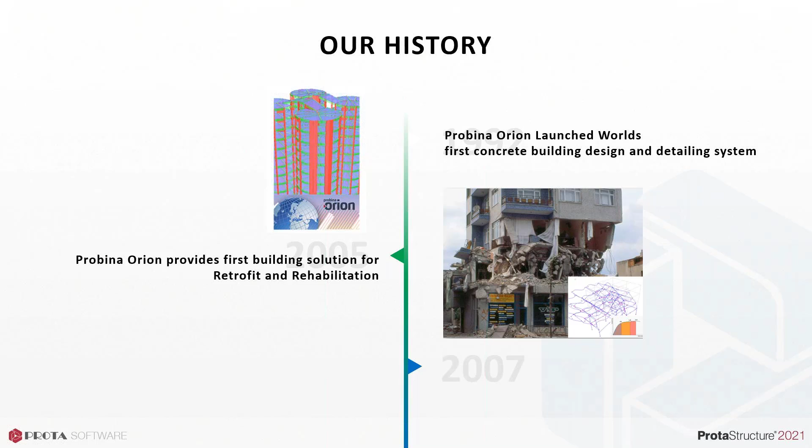world. Here, I want to briefly summarize some of the milestones of ProtaSoftware's journey throughout the years. In 1992, Prota launched Probina Orion, which is the world's first concrete building design and detailing system. In 2005, Probina Orion provided the first building solution for retrofit and rehabilitation. In 2007, Prota invested in BIM technology and launched ProtaBIM, which provides bidirectional physical model integration with leading BIM platforms.

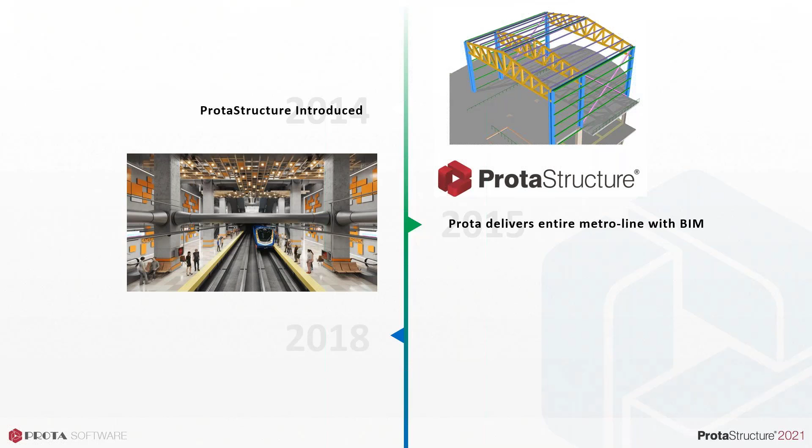In 2014, ProtaSoftware introduced the revolutionary ProtaStructure suite. In 2015, Prota delivered an entire metro line with BIM technology. And in 2018, Prota's engineering team delivered the world's largest passenger terminal building in Istanbul. So the structural design of this entire terminal building was delivered with ProtaStructure.

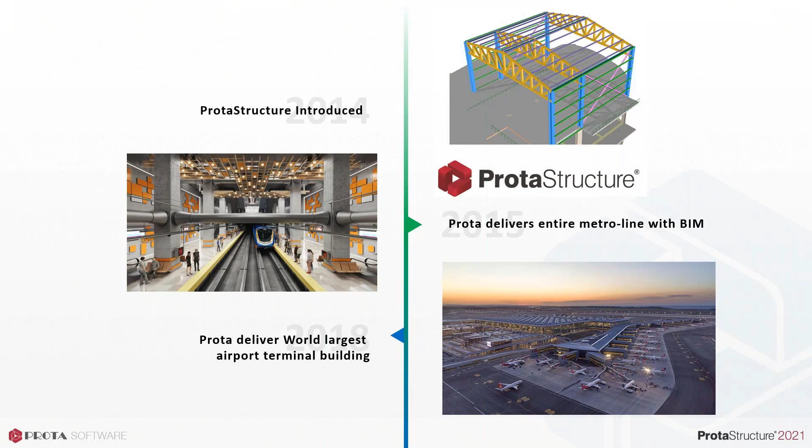So ProtaSoftware's latest technology solutions available for the structural engineering market: we have ProtaStructure for modeling, analysis and design of your structures. Prota Details for your automated detail drawings. It includes intelligent rebars and design libraries such as retaining wall, staircase design and detailing. Prota Steel is our latest technology solution for steel detailing and connection design of your structures. There are drawings and calculation reports within this technology. And we have Prota BIM, which is our BIM tool to bidirectionally link your models with other BIM platforms like Autodesk Revit.

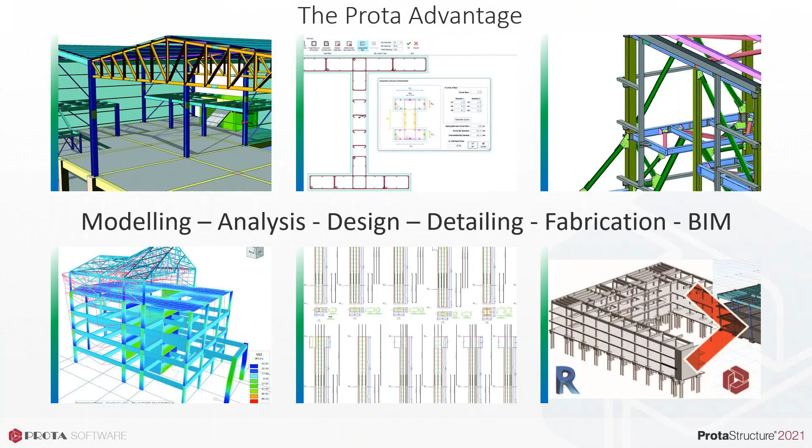So modeling, analysis, design, detailing, fabrication, and BIM. We are very proud to introduce our latest structural BIM design software solution, ProtaStructure 2021. So the Prota advantage is that it is a complete package for modeling, analysis, design, detailing, fabrication, and BIM.

Now I would like to hand over to Dr. Şadan for his introduction to seismic design presentation. Dr. Şadan has a PhD degree in structural engineering from Politecnico di Milano. Having nearly 20 years of global structural engineering experience, by the way, he used to work at a managerial level at Prota Engineering, he founded his own company, OBS Earthquake Engineering.

Dr. Şadan is an expert in earthquake engineering, earthquake resistant structures, seismic assessment, and retrofit of existing buildings. He has also played an active role in the preparation of special rules for design of seismic isolated building section in the new Turkish seismic code for buildings. Thank you. Dr. Şadan, you can start your

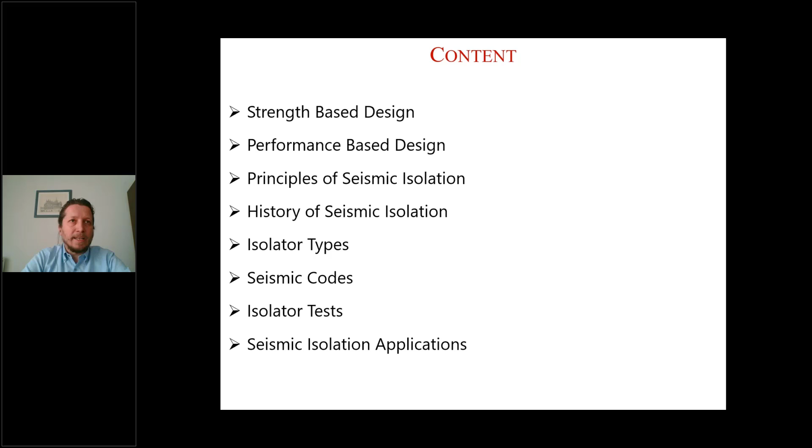In today's presentation, first I will talk about the strength-based design, give a little bit information about performance-based design, which Dr. Tüzün introduced nearly 3 weeks ago or a month ago. Then I will talk about principles of seismic isolation, the history of seismic isolation, the isolator types, seismic codes, isolator tests, and give you some photos and information about seismic isolation applications worldwide.

Let's start with strength-based design. Why I start with strength-based design is that unless you are performing a nonlinear analysis, the design that you are following in the seismic codes worldwide is a strength-based design. When we say strength-based design, it means that you calculate an equivalent seismic force acting on the building, you distribute this seismic force, and you provide sufficient strength for your building to resist these seismic forces.

Like in this example, we can see a bridge bent here with the mass concentrated on the deck level. When there is an earthquake excitation, the inertial seismic forces are acting on the mass of the structure. Then, as a response, some moments and base shears are developed in the structural system, and you design your system. If we designed this bridge bent as elastic, then the structural elements should have sufficient capacity to resist these seismic forces without any damages.

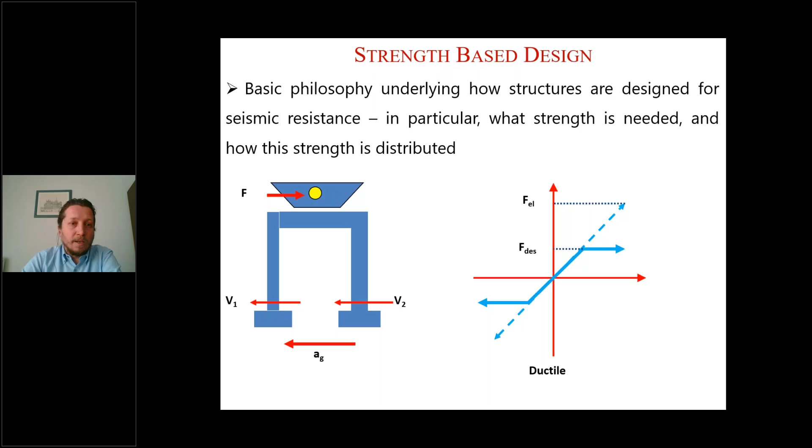However, what we do in strength-based design is not like that. What we do is we divide the elastic forces by a strength reduction factor. Sometimes it is called behavior factor, and we design our structures to this level of seismic force. This means that, however the seismic forces are acting at this level, we design our structure at this level of seismic forces. This means that some damage will occur in our structural elements, but our structural system should have enough capacity to resist these deformations. This was the design for seismic forces.

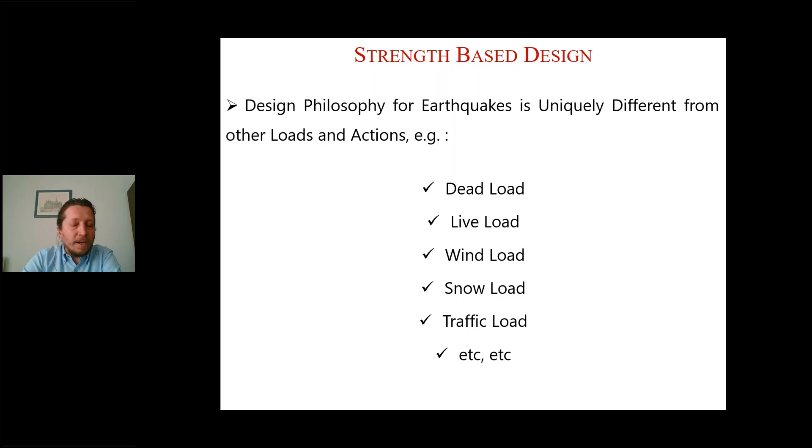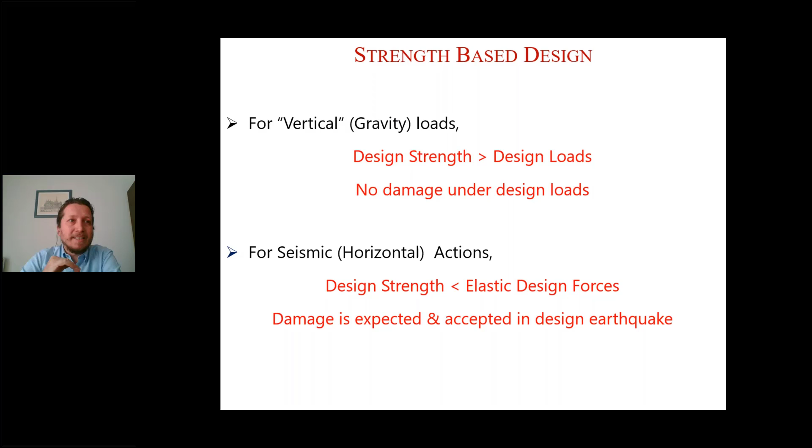However, design for normal loads, what we call dead load, live load, wind load, snow load, traffic load, is different than design for seismic loads. In design for normal loads, we do not want any damage to our structure. We provide sufficient strength to our structural members to resist the normal loads without any damage. However, for seismic actions, it is opposite. We provide less strength than the seismic forces, and we accept that our building will go beyond the elastic deformation and it will suffer some deformation and damages, but the building needs to be stable at the end of the earthquake without a total collapse.

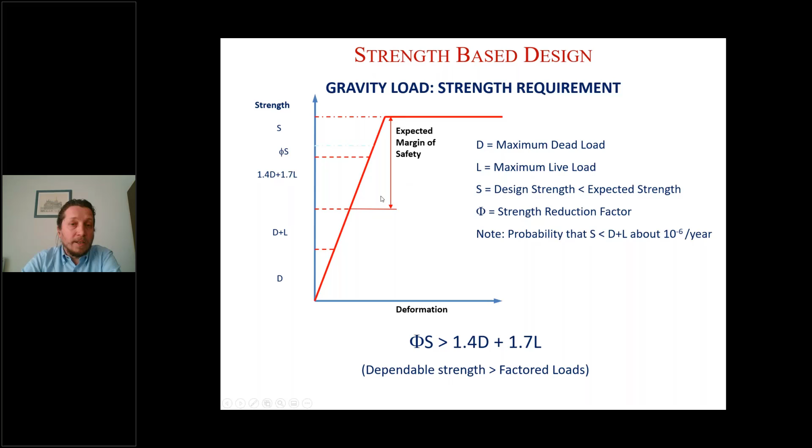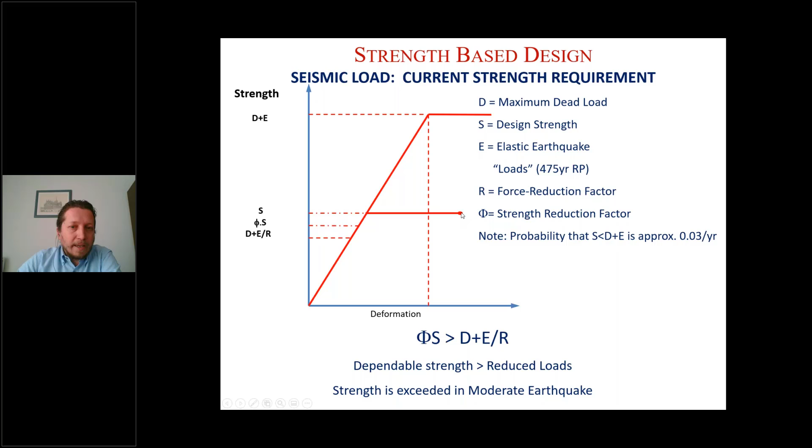In seismic design, it is a little bit different. This is actually the demand of earthquake, the force level that develops when an earthquake hits the structure. But we design our structure at this level, dead load plus earthquake load divided by a force reduction factor. However, we might have a little bit higher strength, since the expected strength of the material might be a little bit larger at this level. And after this level, the building gets damaged, and some hinge mechanism starts to develop. The building should have enough capacity to resist this level of deformation.

The deformation level depends on the amount of seismic action. For a service level earthquake, which we can say is an earthquake with a return period of about 50 years, the deformation will be very limited. Maybe some minor, hairline cracks that can be repaired. For the design level earthquake, where you design your structure, the building will go through a big amount of nonlinear deformation, which means damage in the building, that can be repaired or maybe not repaired after an earthquake. And for the extreme level earthquake, where we design special structures like hospitals or highway structures, important structures, the building goes to further deformation and it should not collapse.

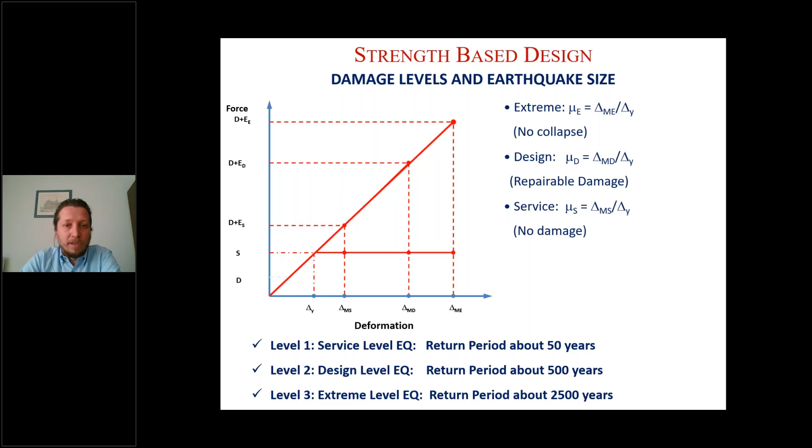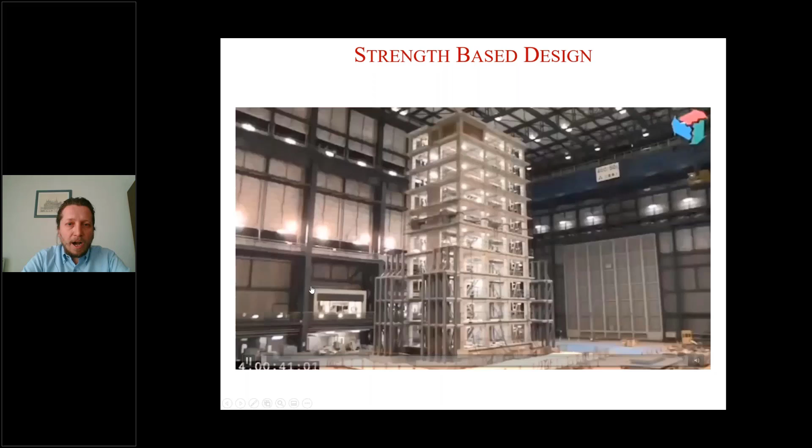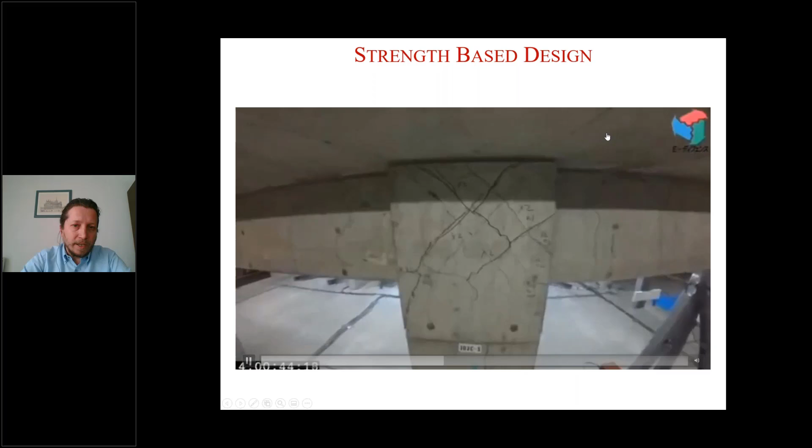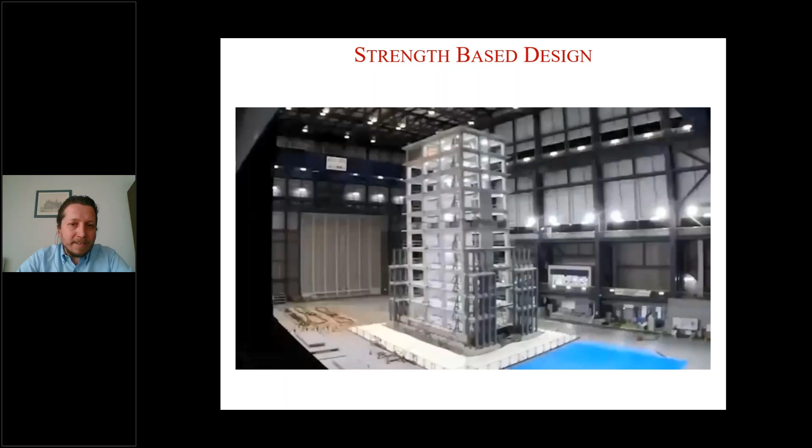Let's see a full-scale building that was tested in Japan at E-Defense Laboratory, and let's see how it behaves. It's a conventional design. When you see there are deformations, because of the relative drifts of the stories, there are deformations, especially in the beam column joints, and this is expected. When we do a strength-based design, we have to follow the capacity design rules to have the damage at the desired locations of our building and not to have collapse.

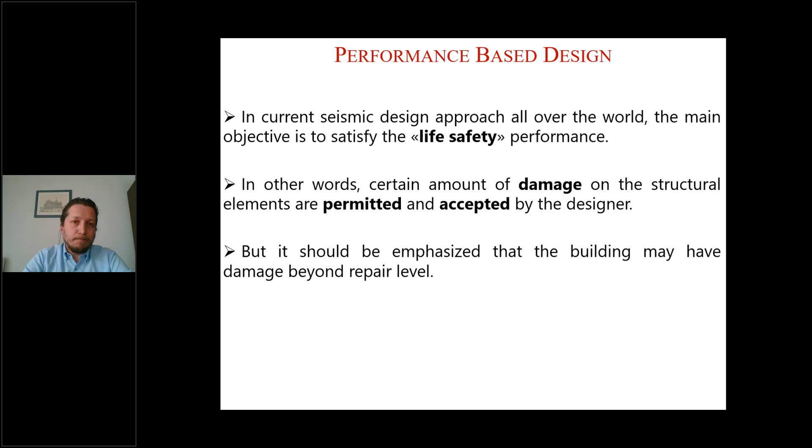Even if you say that for an important structure, for example, a hospital, okay, this is a hospital, it's an important structure, so I have an importance factor of, in the Turkish code, 1.5. This means that you are increasing the seismic force that you are designing your structure for by multiplying it by 1.5. Yes, you can have a building that can resist the seismic actions.

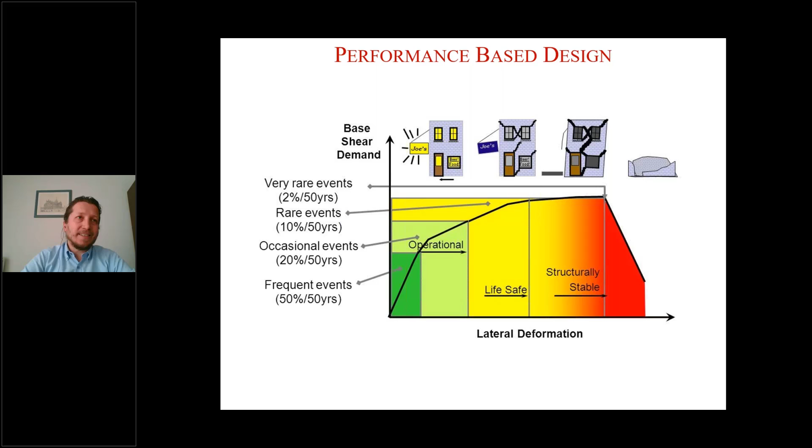Maybe there won't be any structural damage, or maybe there might be some minor cracks that can be repaired after an earthquake. However, when you go inside, you might experience a scene like this. These are buildings. For example, the one on the top was a building that we visited while we went to the Seismic Isolation Conference in New Zealand in 2017. There was an earthquake. The building was designed with modern codes in strength-based design.

This is the view from outside. This photo was taken by us from outside after an earthquake that happened something like 150 kilometers away from the epicenter. And this is the photo, the scene from the inside. Even though you can protect the structural system from earthquakes, inside you might experience a scene like this. Or these are some scenes from other earthquakes, an airport and a hospital.

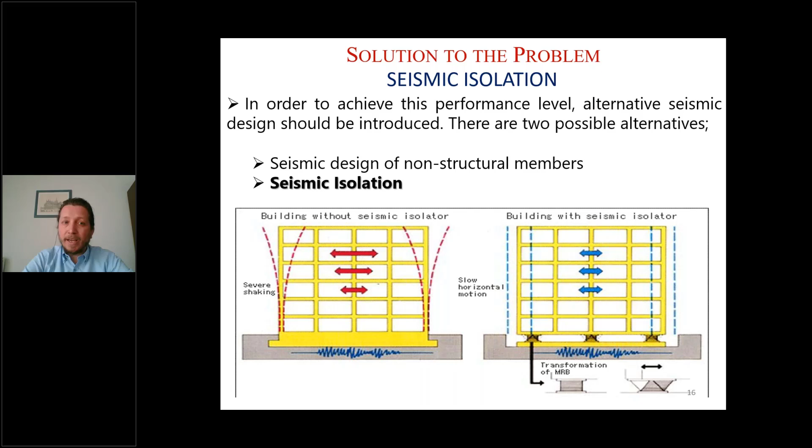A hospital that you designed with an importance factor of 1.5 may seem undamaged from outside, but inside you might see a scene like this, and you cannot use the hospital after an earthquake, when you really need it. So this was the problem. You can protect maybe the structure, you can have some minor damage in your structure, but it is very, very hard to protect the non-structural components in a building. Either you have to make a special seismic design of non-structural members, which can go very expensive, or you can isolate the building. This is the solution of the problem.

So let's talk about seismic isolation. At this seminar, we will not talk about the seismic design of non-structural members, but we will talk about seismic isolation of buildings.

What is seismic isolation? In a conventional design, during an earthquake, the building moves like this. There are deformations at story levels, and due to the relative drift of the story levels, these deformations in the column-beam joints create damage, and the building might not be usable after the design level earthquake, might need to be retrofitted, or maybe demolished and reconstructed. The earthquake has a displacement demand on the building, and the displacement demand for a conventionally designed building is provided by the relative story drifts.

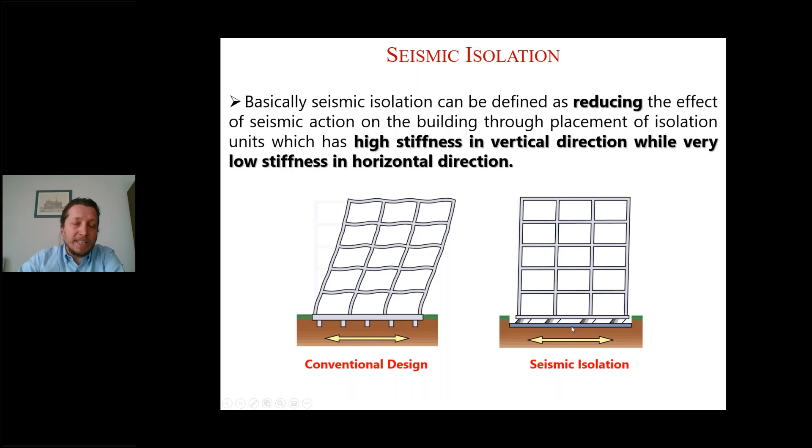However, in a seismic isolated structure, you decouple the building from the ground level. You put some members, some bearings that are very flexible in the lateral direction, but very stiff in the vertical direction, so that they can carry the vertical load of the building, but during an earthquake they can move in the lateral direction. The displacement demand of the earthquake is provided by the seismic isolators in this case.

How does it work? Seismic isolation works by modifying the vibration properties of the building by installing the isolators. As such, the destructive signals of the seismic event are reduced. There are two figures here. One is the seismic isolated building on the left. The other one is the conventionally designed building. You can see that during a seismic event, the inhabitants of the building might not even notice that there was an earthquake, and all the structural and non-structural members are protected in a seismic isolated building.

However, in conventional design, you can see that even though maybe the building does not collapse, non-structural components fall down, some mechanical equipment and pipes can break, and the building might not be usable after an earthquake. So the main benefit of seismic isolation is the reduction of the story drifts, which is related to the damage in the building, and reduction of story accelerations, which means that you reduce the seismic force acting on the building.

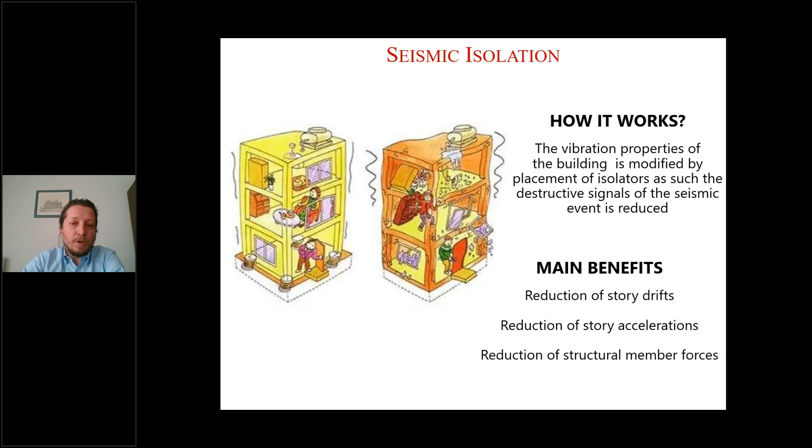Hence reduction of structural member forces. Let's see a similar test for a seismic isolated building that was tested in Japan, a shake table test. Below you see a blue surface, that is the shake table itself, and the green pistons on the left that simulate the earthquake for this building.

The building is a reinforced concrete building that was designed as a hospital. You can see the furnitures in the building, and below there are seismic isolators, and it's a strong shake. Actually, the building moves over the shake table, which represents the ground.

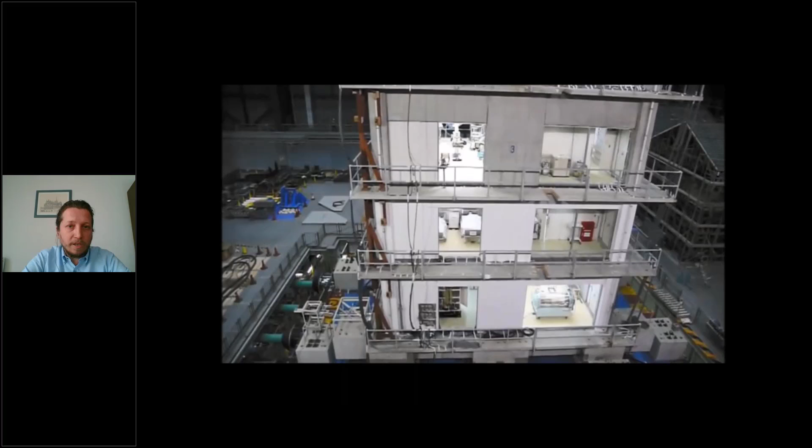It floats nearly. What you see is that only the sliding components of the building and the roller furnitures move in the building, but the overall system does not get damaged, and there are no non-structural damages in the building. If this was a conventional design building, you will see both structural damage and non-structural damage at the same time.

This is another video recording that was recorded during Tohoku earthquake. Maybe it is a little bit further than the epicenter of the earthquake, but here you see the ground level column. The seismic action started, the earthquake started. You see that only the ground moves, but the building is like floating on the isolator, which is the black member here. And here you see the displacement that it makes. Since it is a little bit far away from the epicenter, the displacement levels are nearly 10 centimeters.

And here you can see the acceleration records in the ground floor and above the isolator. And you can see that the acceleration levels are reduced nearly maybe 3 times, 4 times.

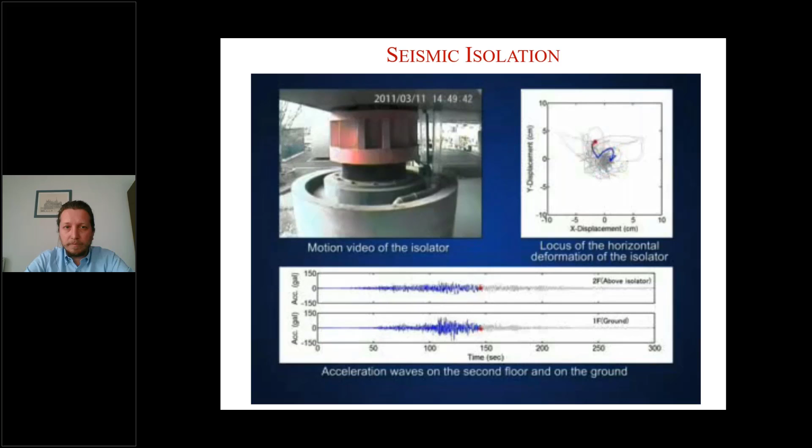Another footage from an earthquake in Japan, again, I guess. This is the building, a seismic isolated building. Please notice the shoes on the ground and the building here. And when the seismic action starts, actually the ground moves, not the building again. And you can see how the building reacts to the earthquake. You see how the ground displaces during the seismic event, but the building stands still.

Yes, we talked about how good seismic isolation is. It's a new technology. No, actually, it is not a new technology. In history, it has been used, maybe consciously or unconsciously, several times. For example, one example is a tomb in today's Iran. It's the tomb of Cyrus, a Persian emperor.

When they designed this tomb, over the ground they put stones that act like a foundation, without any connection to the ground and without any connection between each other. So during an earthquake, these stones move on top of each other, and by friction they damp the earthquake forces, and this tomb is still standing after several thousands of years.

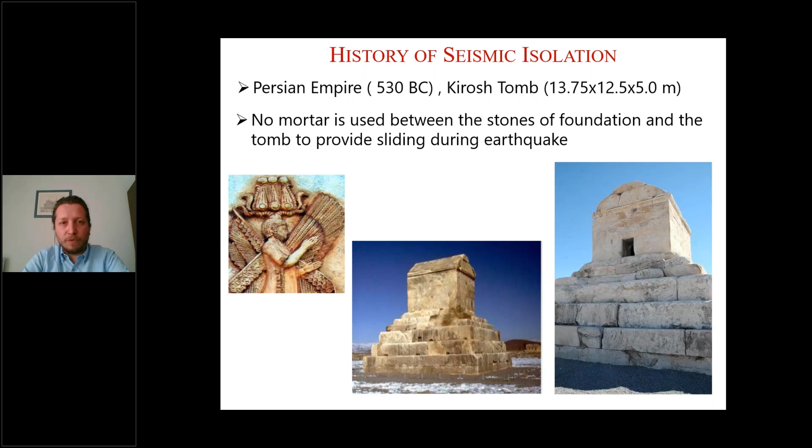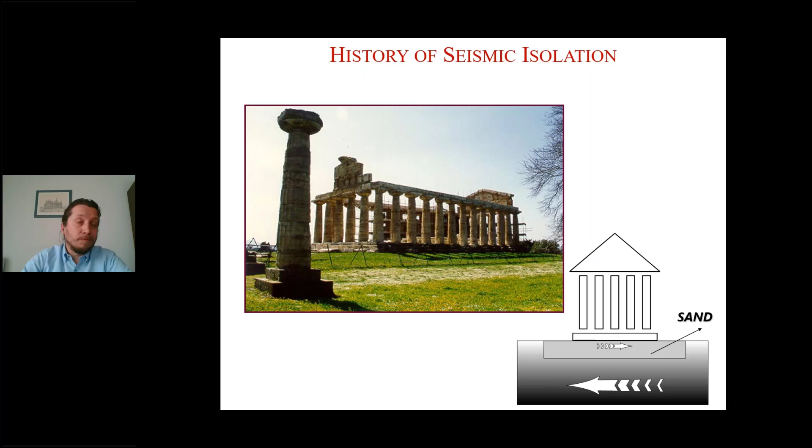Another example might be the Greek temples. You can see Greek temples standing like that. They are very vulnerable structures. They are constructed on stiff soil with a sand level on top. So during an earthquake, the temple moves on the sand layer, and they do not get harmed, or at least they get less damage than a conventional design.

Another example from Istanbul, an obelisk, the Theodosius stone, that was placed in Istanbul Sultanahmet Square after Christ, in the 4th century. It is nearly 20 meters high, but it's still there. After several earthquakes, it still stands there, just by the help of 4 little bronze cubes below the stone that rocks during an earthquake, which is a similar seismic isolation principle. It's a very vulnerable, slender structure, but it's still there.

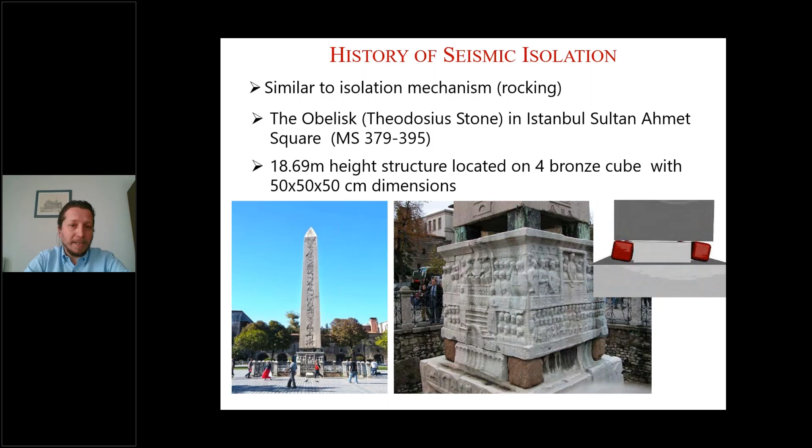And beginning from the 19th century, people tried to make this a market product. The first known patent application was in 1870, for a building resting on 2 concave plates with some rollers inside. Then in 1897, again, 2 concave surfaces under a building with a single articulated block, which is very similar to the modern friction pendulum devices.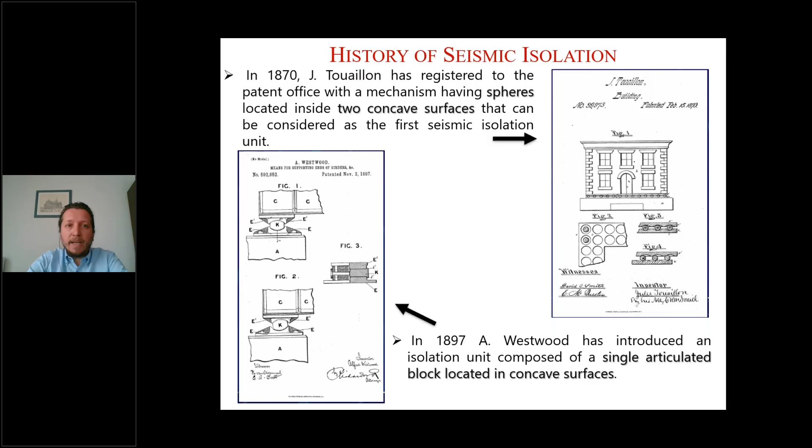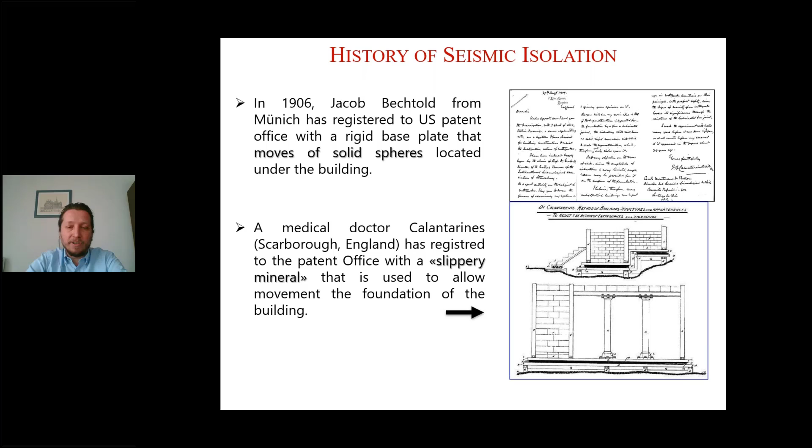In 1906, again, we see a patent application. Then a medical doctor in England thought that if we could put some slippery mineral below the building, a talc powder, it may help the building to slide on this slippery mineral. But until 1974, there was not a market product.

In 1974, William Robinson invented the lead rubber bearings in New Zealand, and we are still using these lead rubber bearings in our buildings. I will talk more about lead rubber bearings, but they are composed of rubber layers to give the lateral flexibility to the bearing, steel shims to give the vertical stiffness to the rubber isolator, and the lead core inside just to provide additional damping to the bearing.

Then in 1985, Victor Zayas in USA invented the first prototype of friction pendulum bearings, sliding bearings, or curved surface sliders, let's say. There is a concave surface and a sliding puck inside, which moves during an earthquake, and by the help of friction, it dissipates energy.

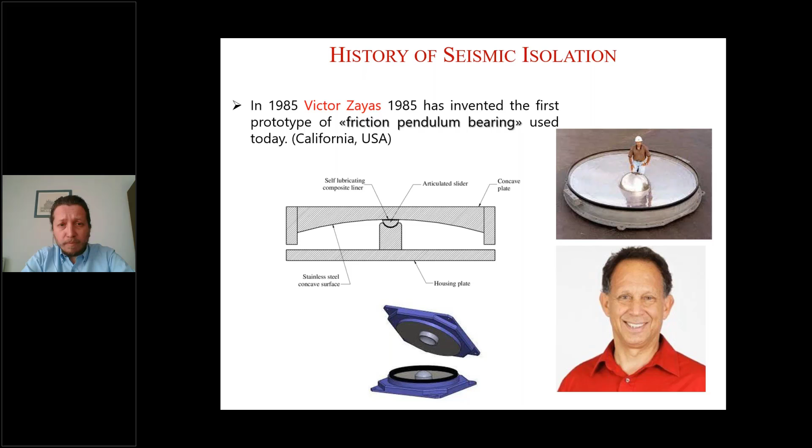And the first applications of seismic isolation with real seismic isolators, but they were all rubber isolators actually, not lead rubber isolators, we first see in Japan, in Tokyo in 1921, Imperial Hotel. It survived the big Kanto earthquake in 1923. This was the information that we could find in the literature. It survived with minimum damage actually, while the other buildings around were getting high damages.

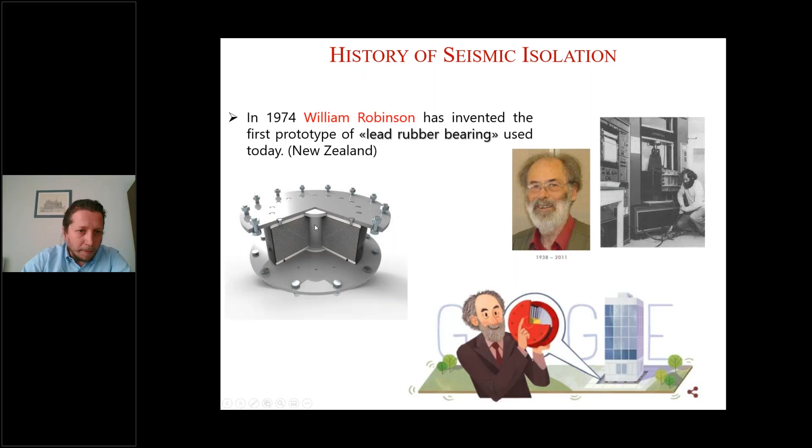Another building in Europe, in former Yugoslavian Republic of Macedonia, the Pestalozzi school in 1969 was constructed over rubber isolators. They put rubber blocks there as isolators, but they did not put steel shims. So you can see that by the axial load acting on them, in time, they started to make bulges around.

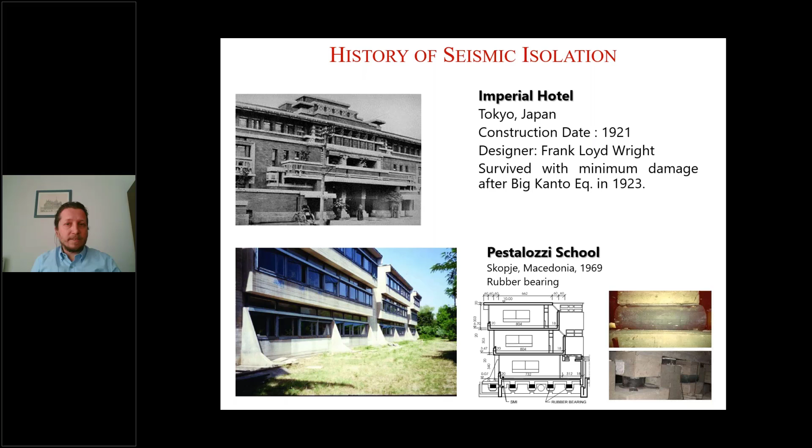So in time, maybe 20 years after the construction, they removed those isolators and installed lead rubber isolators instead. They also tested these isolators and compared the initial testing results with the test results 20 years later, and the results were very similar. So yes, there are some effects of aging, but not that much.

So how do these isolators work and how do they protect our buildings from severe seismic actions? Actually, there are two effects of seismic isolation. The primary effect of seismic isolation is the period elongation. When you construct a traditional building, a reinforced concrete building, let's say, the natural vibration period is between 0.3 and 1 second. Let's make a guess. If the building is 5-story or 6-story, then we can say that the natural period of vibration is 0.6 seconds.

And when you check an acceleration response spectrum, or a base shear period graphic, you can see that in the lower ranges of the period, there are higher accelerations and higher forces acting on the building. So when you design a conventional building, the seismic forces are high. But in seismic isolation, the building periods are between 2.5 and 5 seconds due to the lateral flexibility of the isolators. So you shift the period from 0.5 seconds, let's say, to maybe 4 seconds. And there is a great reduction in the acceleration response spectrum with the elongation of the period. So less seismic forces are acting on the building.

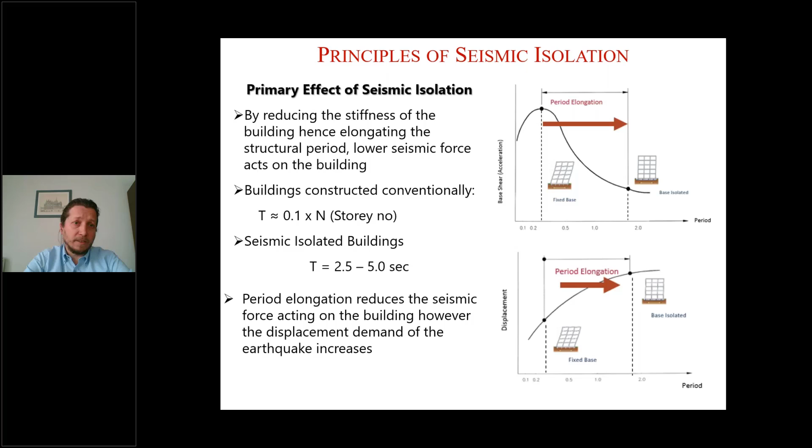The secondary effect is increasing the damping of the structure. In a conventionally constructed building, let's say a reinforced concrete structure, the modern codes say that you can deploy 5% damping for the design of your structure. This is related to the friction in the concrete material, some damages, some crack openings and closings. This is related to the damage actually, the 5% damping. In seismic isolated structures, this damping is between 10% and 40%, on average 20-25%.

And what does this damping do to our structure? With increasing damping, the displacement demand is decreased. So if you increase the damping, there will be less story displacements and less demand from the isolator displacements. And when you decrease the demand, you also decrease the force as well. So with increasing damping, you decrease the displacements and also the accelerations acting on the building.

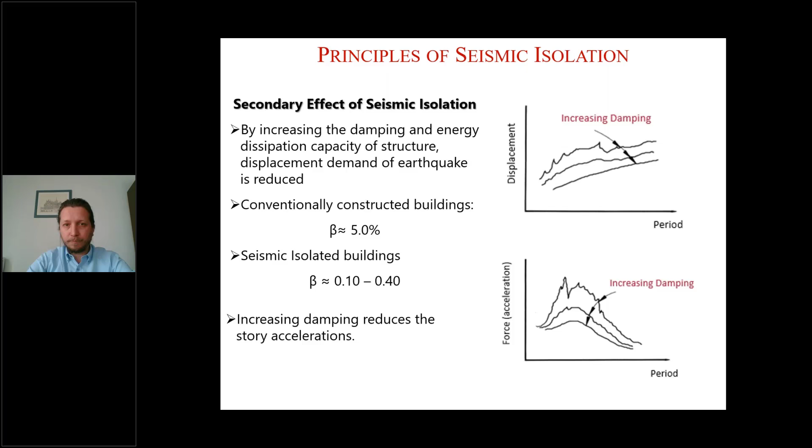Let's talk about the isolator types. The topic is a very large topic. There are several things to talk about, but I'm just giving you the basic things that you might need to know. I'm introducing you to seismic isolation. So if you want to go further, please check some literature, or maybe we can make another seminar with more details on seismic isolated building design.

So what are the isolator types? There are two main isolator types that are being used in the world. One of them is rubber bearings, the other one is curved surface friction isolators.

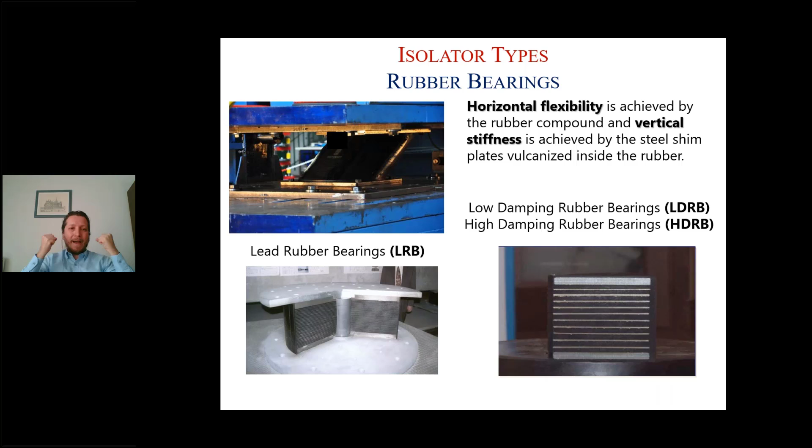Other than this, there are lead rubber bearings, as I said, where you make a hole inside the same low damping rubber bearing compound and you plug the lead inside. So the damping is provided by the lead inside. You might ask, okay, this isolator displaces like maybe 50 centimeters in 360 degrees in both directions. How does it return back? This is rubber. Rubber is elastic. When you pull the rubber, it displaces, it elongates. When you leave it, it comes back to the original position. So it's the same. When the building displaces, the rubber itself is pulling back the building to the original position, it recenters.

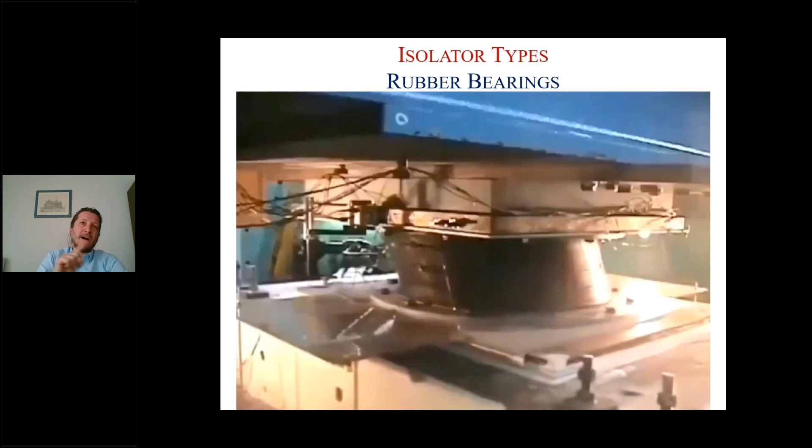Let's see a rubber bearing in action. A seismic isolator test. You see that the rubber bearing displaces. This is a real ground motion record applied to the isolator. But normally we do not do this in the test according to the code. We mostly apply the seismic action in a single direction, unidirectional, sometimes bidirectionally, but mostly unidirectionally.

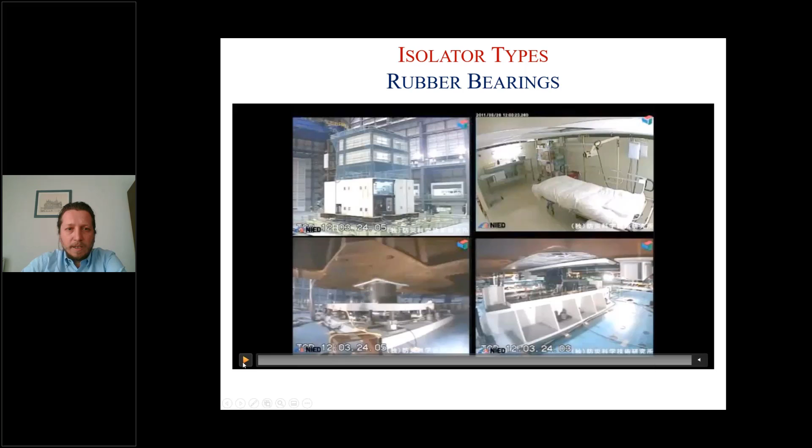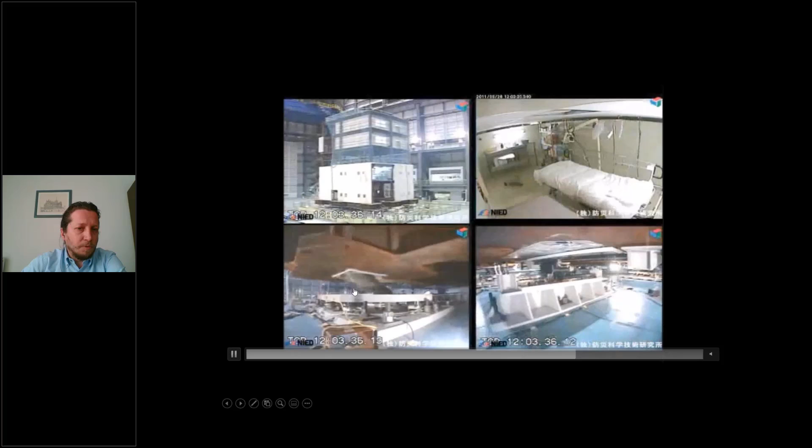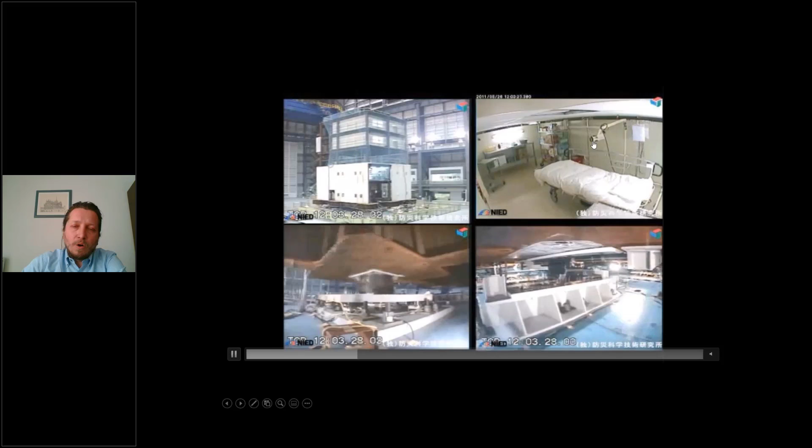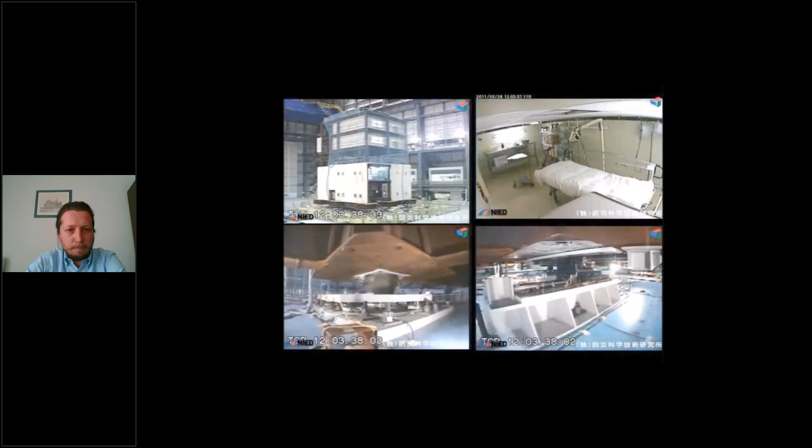Let's see a test from the same testing facility, a shake table test. And you can see the rubber isolator here on the left, with some cross-linear bearings adapted. You see that the bearing moves, the building moves on the bearing. There is a lot of displacement. You can see maybe 60 centimeters, 70 centimeters displacement. Only the furniture with rollers or suspended things move in the building, but you do not experience any damage to the structural and non-structural components. If it was a conventional design building, you would see a lot of damage.

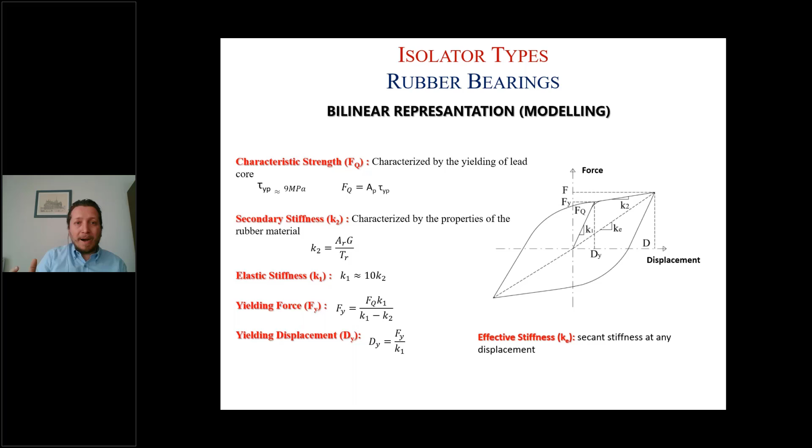When we design, we first do an equivalent linear analysis, then we do non-linear time history analysis, because the rubber behavior is highly non-linear. But every time we compare the results of non-linear time history analysis with equivalent linear analysis. When you do equivalent linear analysis, you have to know how much equivalent damping is obtained by the isolation system. So you need to calculate this.

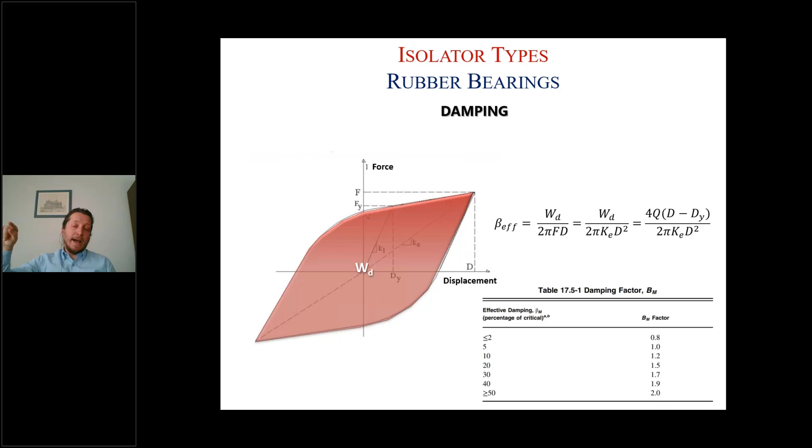Here is a table from the American code, ASCE. If it is 20%, it says that you can reduce the 5% acceleration spectrum by 1.5. For the 5% that you generally use in your design, the factor is 1. If it is 20%, 1.5. If it is more than 50%, then you can reduce the acceleration spectrum by a factor of 2.

The other type that we commonly use is the curved surface sliders. I prefer to say curved surface sliders because friction pendulum is a product specific term. I mentioned Victor Zayas; he first called it friction pendulum, so in general terms, we can say curved surface sliders. How they behave is actually very simple. It's a pendulum motion.

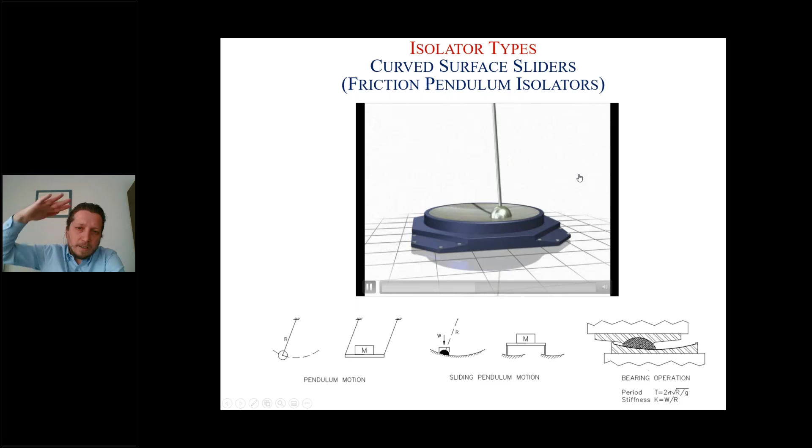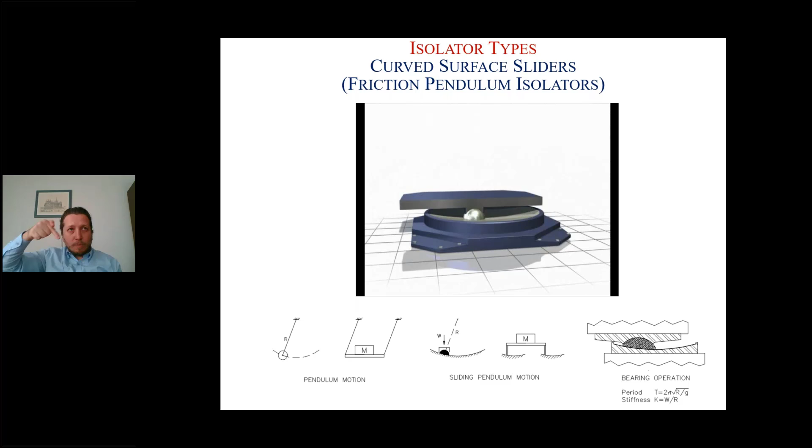You have a curved surface, like here. Now we will see the curved surface plate. On top, a slider, then an upper plate, and you construct your building on top of this. So the pendulum motion is independent of the building itself. If you know the radius of curvature of your isolator, then you can easily calculate the period of vibration of your structure.

The period equals 2 pi times the square root of the radius of curvature divided by the acceleration of gravity. You can take a rope with a mass on it and make it vibrate. The vibration period will not change with the force acting on it. It will always be the same. So this depends on this. It's very easy to calculate the equivalent linear properties of friction isolators, and it depends on the pendulum motion.

There are 3 types of pendulum isolators commonly used. The first invented one was the single concave pendulum isolator, but this had some problems. The main problem is that it depends on the friction. When there is friction, there is heat, and when there is heat, the friction coefficient drops. In a high seismic region during an earthquake, the upper concave plate will move on the lower concave plate, and a lot of heat develops here. So there will be a reduction in the friction coefficient, and also the displacement capacity is limited.

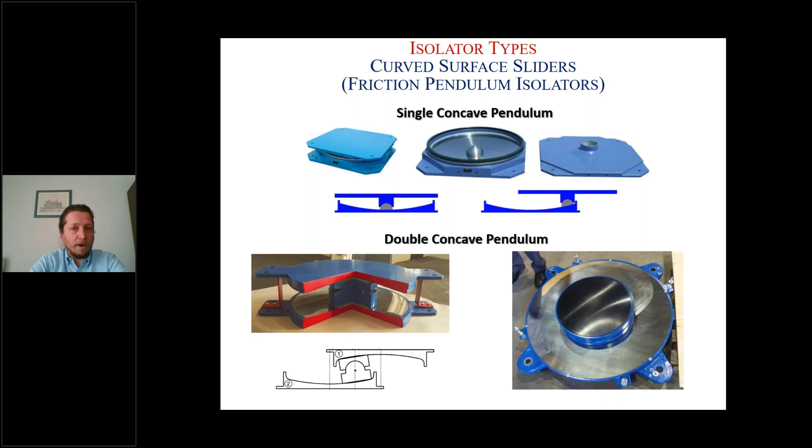Now there is the third invention by Victor Zayas. After the patent expires for the double concave and single pendulum, he invented triple friction pendulum isolators. Actually, this doesn't mean that there are 3 different surfaces. Actually, there are 4 surfaces. You can see that there is an initial part here. There are 2 surfaces here and 2 surfaces here, but there are 3 frictions. He can adopt 3 friction coefficients for 3 different surfaces: 1 friction coefficient here, 1 here, and 1 in this part.

And there is a lower friction in this interior part, let's say less than 1%. So even with a small earthquake, this isolator starts to move. In other types of isolators, let's say the dynamic friction is 5%, unless 5% of the seismic weight of the building acts on the structure, they do not move. They act like a conventional building. It means that after some level of earthquake, they start to move. Before that, they move like a conventional building design.

This has a great advantage. With even a small earthquake, they start to move. So it gives you comfort during an earthquake. I mean, with a 4 magnitude earthquake or 5 magnitude earthquake, you do not want to feel the fear of earthquake like in the other conventional building designs. So this has a great advantage.

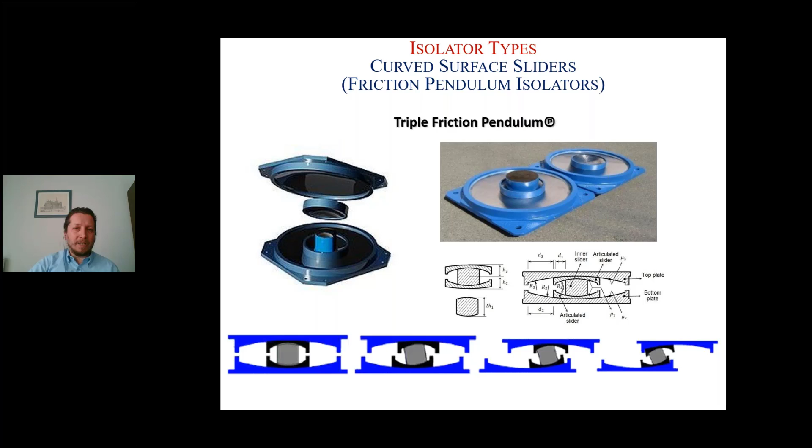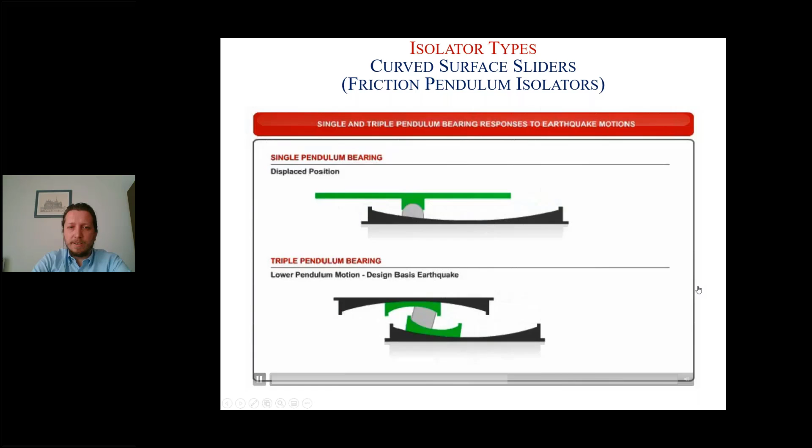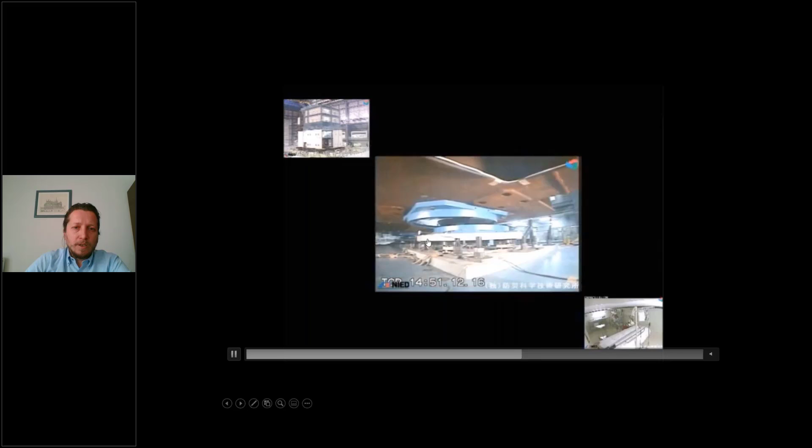Let's see the difference between a triple pendulum bearing and a single pendulum bearing from this illustration. You see that a single pendulum bearing moves on a single surface, but in a triple friction pendulum, first the motion starts in the interior part with less friction. Let's see it again. With less friction, less than 1%, and then it moves on the upper and lower plates. The difference is this. Let's see a triple friction pendulum in action. Again, in the same laboratory, a shake table test. Again, a hospital. It is adapted as a hospital. You can see the displacement, maybe again 60-70 centimeters, and the building stands still.

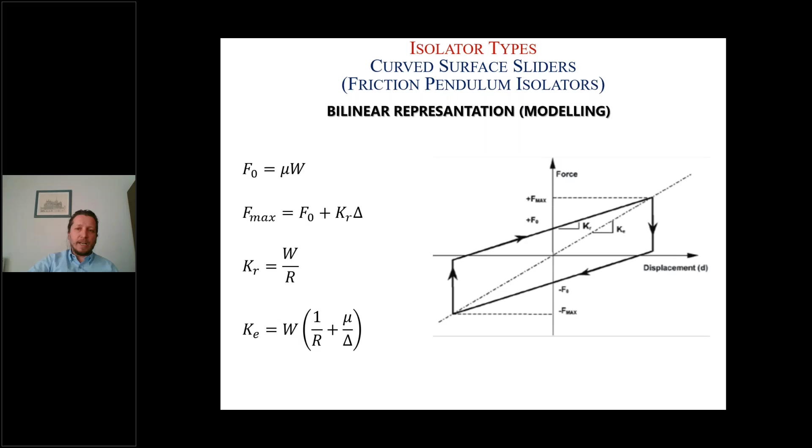But since there is a curvature, it behaves like that. And the secondary stiffness depends on the axial load on it and the radius of curvature. So if you want to calculate the maximum force, you can sum up the force at which it first starts to move and the force that you calculate by the secondary stiffness multiplied by the displacement, any displacement you want, and you can calculate it easily. And if you want to know the effective stiffness, you can take the secant stiffness to this level. So if you know the mass of your structure and the effective stiffness, then you can calculate the effective period of your structure.

And if you are doing an equivalent analysis, you will need the equivalent damping. It's again the same. If you calculate the area inside and put it into the formulation, then you calculate the equivalent damping. And again the same. If you have 20% equivalent damping, then you can reduce the acceleration response spectrum by 1.5.

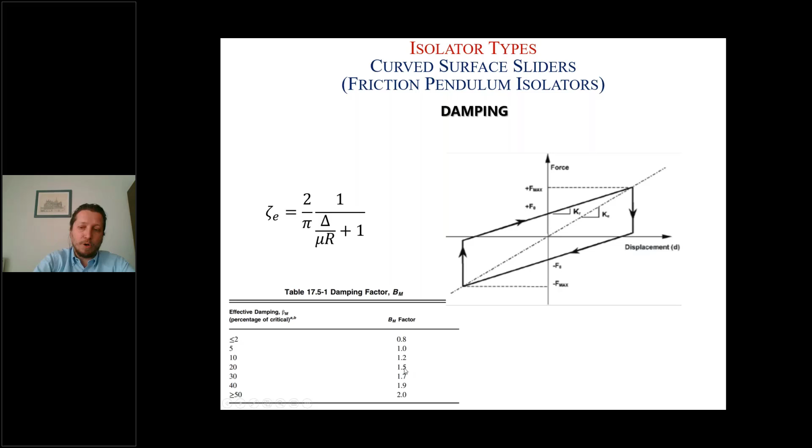What are the codes that are followed? I might miss some of the codes. Sorry if there are other codes that are not mentioned in the seminar. If you are using another code, please write in the comment part so that I know. The American codes are the most commonly used in the world, mostly ASCE 7-16, chapter 17 of ASCE 7-16.

Then if it is a bridge with isolators, you use the AASHTO Guide Specifications for Seismic Isolation Design. There are European codes, Eurocode 8. There is a chapter for seismic isolated building design in Eurocode 8, EN 1998-1. For seismic isolated bridges, you have to apply EN 1998-2. And for the isolation devices, anti-seismic devices themselves, you have to use the EN 15129 code. There is really detailed information about the design of isolators, the isolator components, and the tests in this code.

It was published in 2009. I think the official version of the new revised edition has not yet been officially published. I'm not so sure, but there should be a revision very soon. As far as I collected information, there is a seismic isolated building design code in China, in Mexico, in Taiwan, in Japan, and in Turkey.

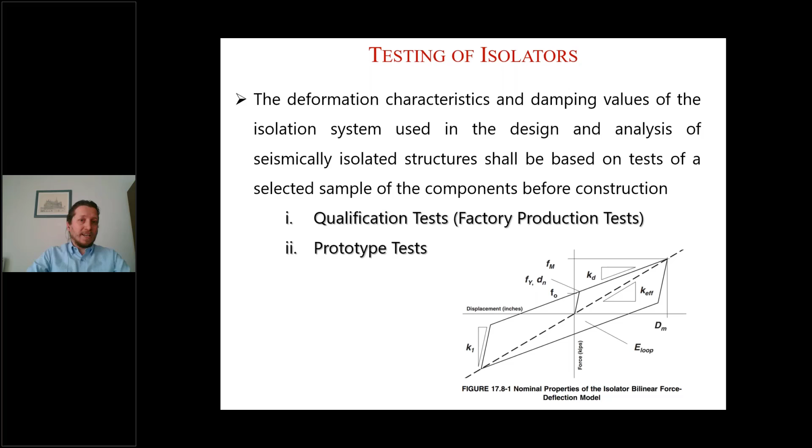There are several testing facilities all around the world, but mostly concentrated in Italy and the United States. These are the testing facilities that I collected some information on, but there might be additional ones in the near future. This information was 2-3 years old. It might have changed.

The second most commonly used testing facility is in Italy, in Pavia, the Eucentre. The vertical force capacity is 50,000 kilonewtons. Displacement capacity is nearly 500 millimeters, and the velocity is 2.2 meters per second. But the displacement capacity of SRMD, the one in California, is much larger than the Eucentre: 1.2 meters in SRMD, while at the Eucentre it is only 500 millimeters.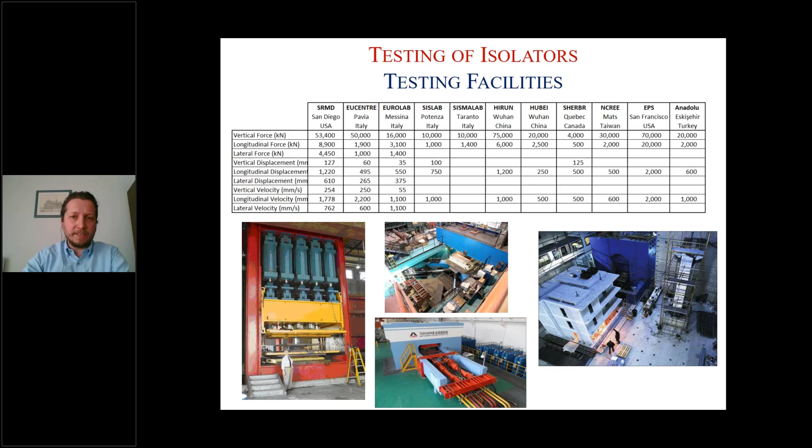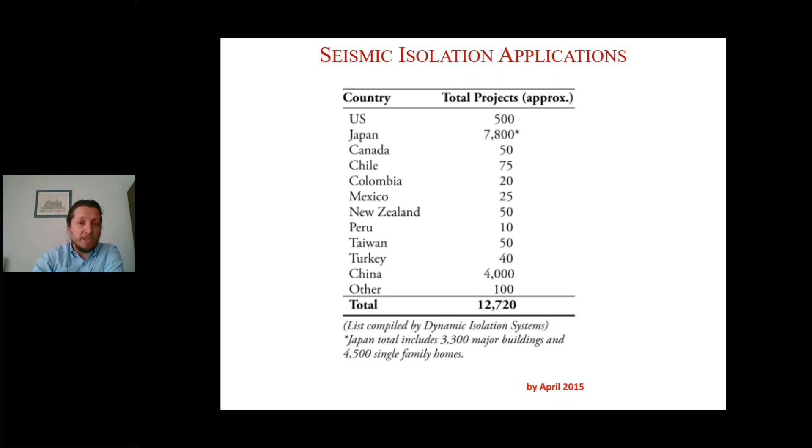Now you will see the world's largest seismic isolated buildings. In Japan, you can see even small residential buildings, maybe 1-story, 2-story high, with maybe 5-6 isolators only. But in Turkey, the average isolator quantity in the applications is around 300 to 400, and there are applications with more than 2,000 isolators in Turkey. We will talk about this.

In 2017, Engineering News Record magazine published an article about the world's largest base isolated buildings. I will show you 10 of those base isolated buildings in this magazine as of July 2017. Number one used to be, let's say right now, because there is a new record breaker,

Apple's headquarters in California, covering nearly 450,000 square meters, with 700 base isolators. The second one is in Turkey, Adana City Hospital in the southern part of Turkey, which covers 430,000 square meters. So they are actually very close to each other.

The slab over the isolation, a unique slab, is from here to here something like 300 by 300 meters. It's a very large slab, and the building sits on this 300 by 300 meter slab. The third record breaker is the Tokyo Skytree East Tower in Japan, with nearly 230,000 square meters. The fourth one is again from Turkey, Isparta City Hospital, covering 220,000 square meters.

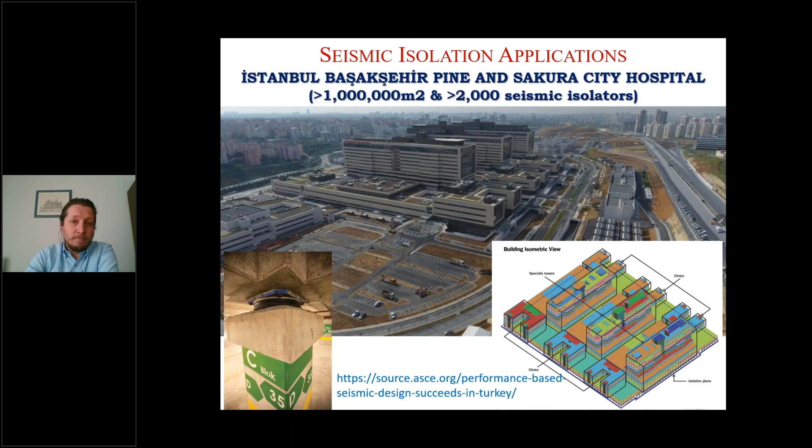Now I will go a little bit deeper. I will show you some photos from the construction stage for the designs of Prota again. I used to work in Prota between 2010 and 13. We designed this hospital, one state hospital in the southeastern part of Turkey. We used friction pendulum isolators by the producer FIP in Italy.

The important thing is that friction pendulum isolators are actually very easy to manufacture. If you have a CNC machine, then you can make the concave surface. But the know-how is in this yellow material. Sometimes it's yellow, sometimes it is black. It is the friction material, which is composed of a Teflon-based material. It's called PTFE.

So it should resist high axial loads, it should have a constant and low friction coefficient, and it should resist high sliding displacements. This yellow part is the sliding surface, and this black region is the dust cover. You do not want dust, rubbish or concrete to come onto the sliding surface, so you need a dust cover. And the manufacturers' solution is a skirt like that.

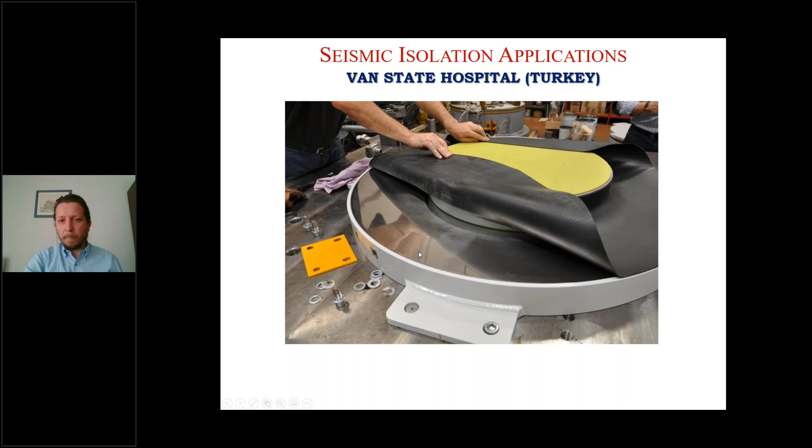And you can see the shiny part. This is the stainless steel part that this yellow sliding material moves on. This is the old testing facility, a slow speed testing rig of FIP. Now they have a dynamic machine. And these are some photos from the construction.

The isolators were constructed on top of the basement floor, below the ground floor. You can see the pedestals, large pedestals, something like 1 meter by 1 meter, and the isolators are placed on top of these pedestals. Now you can see an isolator placed on top of the pedestal. You can see the anchors that will go into the superstructure. These anchors work only in friction, in shear. They do not take any traction or tension forces, because it's like a curved surface plate. If there is a tension force, there is uplift. So they are designed for shear force only. And you do not see it here, but the grout will be applied below the isolator here.

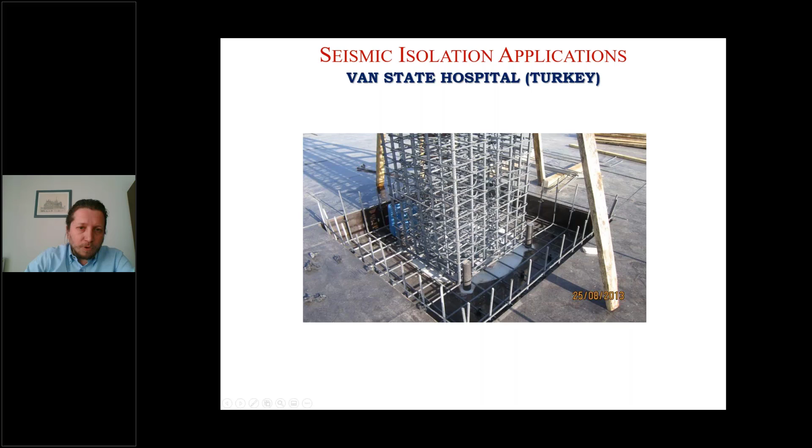You can see the formwork on top of the isolator, where the column reinforcement will come, the base of it. Then the column reinforcement is applied here. Then the rest will be the slab. There were some special solutions for the elevator shafts and the staircase shafts. The main isolator interface is on top of the columns of the basement floors, but the isolators of the elevators and the staircases were on the foundation level. So you have to have a gap around this elevator shaft to make it move with the principal isolation layer. You can see here the elevator shafts being constructed and the gaps, and the main isolator interface is on top of the columns.

This is another photo from the construction stage. The isolators are placed, and on the right you can see that a part of the superstructure is also being constructed. This is a nearly final photo of the construction. You can see that the isolators are on top of the basement floors. Maybe I can magnify. The isolators are on top of the basement floors, and the basement walls are not continuing to the upper floor, because you need your superstructure to move on the isolators. You should not connect anything from the base to the superstructure. Whether structural components, walls, pipes or cables, they should be flexible at this isolation interface.

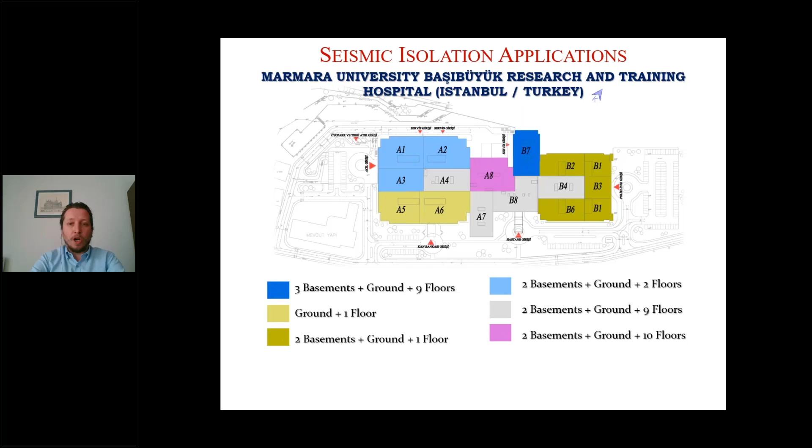This is the plan view of the hospital. You can see that there are several blocks. Each color shows different story heights and different basement floor numbers. So it was a really complex structure, and it was the first retrofit in Turkey with seismic isolators. It was a really challenging job. The primary isolation surface was decided to be over the first basement floors, below the ground floor slab. You can see the first basement floors, the primary isolation interface and the isolators below the ground floor slab, and the isolators below the elevator shafts and the staircases were on the foundation level.

But since at some points there are 2-story levels and at some points there are 3-story levels, you have to make a seismic gap between these levels. Why do we do that? Because if you place the isolator on the primary isolation interface for these elements, during a seismic action, if the elevator is at that level, it may lead to casualties, as well as interrupt the performance of the isolators. So we put isolators below the elevator shafts, but these isolators are designed with low lateral stiffness. They were friction isolators with low friction coefficients, just to protect this connection here, because it will now act like a cantilever. So we have to protect this joint.

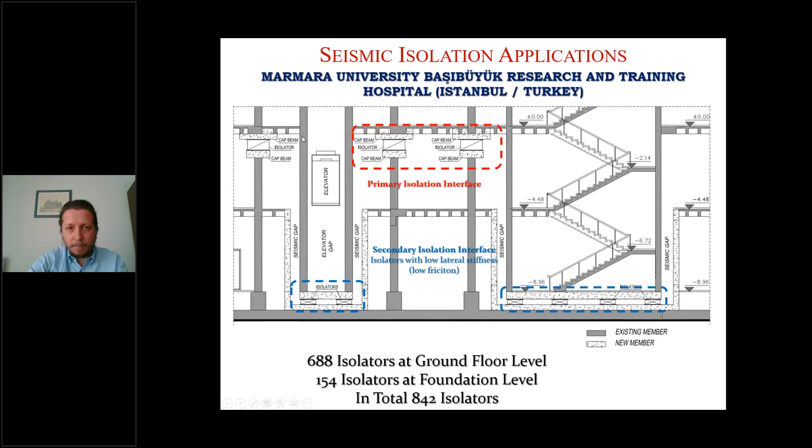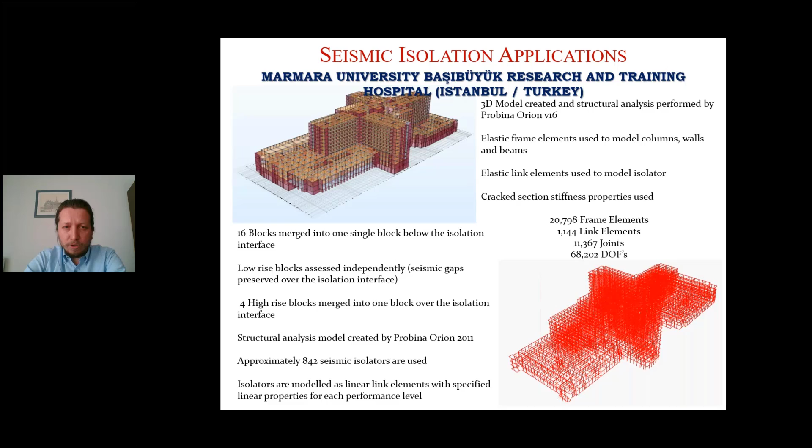At that time, in some part of the project, we used Probina Orion in 2011. It is the ancestor of ProtaStructure. We modeled the structure with that, and we performed the equivalent linear analysis by the help of Probina Orion. This is the plan view of the isolators, the layout of the isolators. You can see that there are lots of isolators, and this is the construction methodology.

What we do first, since the columns, when you cut the columns, they start to behave like a cantilever, and the reinforcements do not have enough strength to resist this cantilever action. So first of all the columns are jacketed by reinforced concrete jackets. Then it's a technology of Freysaş in Turkey, Freyssinet group.

There are 2 clamps, one on top of the column and the other one below the isolator, and you put the hydraulic jacks here. Then you load the jacks with the axial load on the column. So there is a non-loaded part where the isolator will be installed. Then you cut this part and you install the isolators, and then you release the jacks.

So in this case, for example, the load is transferred from the clamps to the hydraulic jacks, then to the below column. And now at the end, the load is transferred from the column to the isolator and then the lower part of the column. Let's see a video of that, and then I will conclude my presentation.

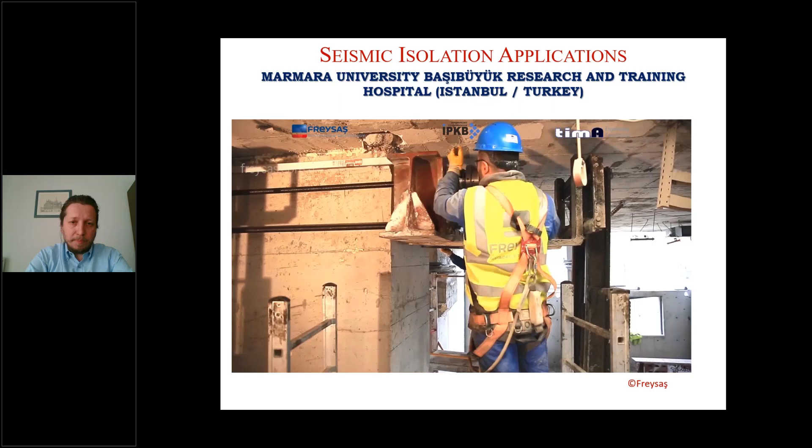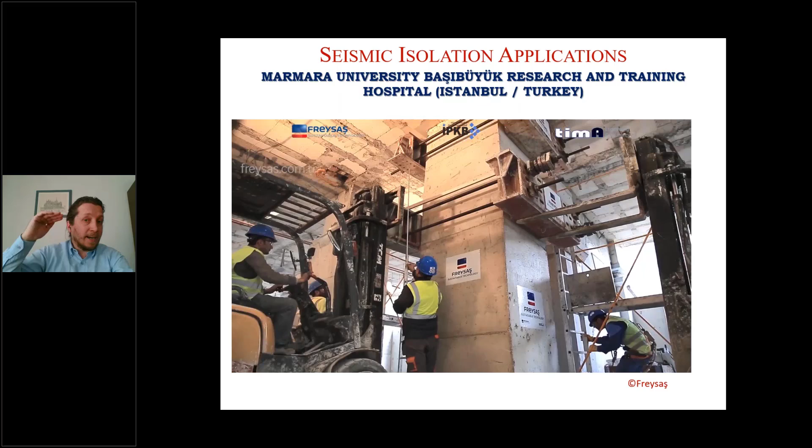You see that right now they are installing the clamps, the upper clamp right now, and they apply the post tension to the clamps. They stay there with the aid of the friction between the steel plates and the concrete. And there are 9 floors over these hydraulic jacks. Now they installed the hydraulic jacks. They are checking the magnitude of the force.

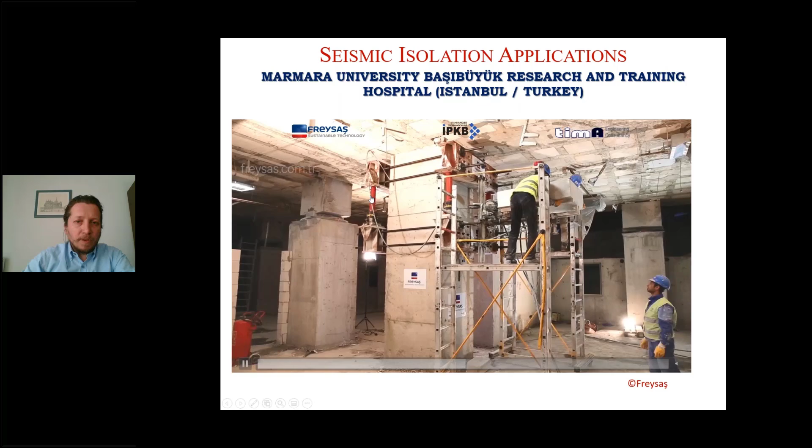Now they are cutting the column with a diamond wire. It is being cut. Now they are extracting the cut part. They are installing the lower plate and upper plate of the isolator with the help of the grout. Then they install the isolator to the upper and lower plates, and now the building sits on the isolators.

Thank you very much, Dr. Shadan, for being here and this wonderful presentation. Seismic design and isolators are interesting topics for structural engineers, and ProtaSoftware has been delivering these design techniques for several years.